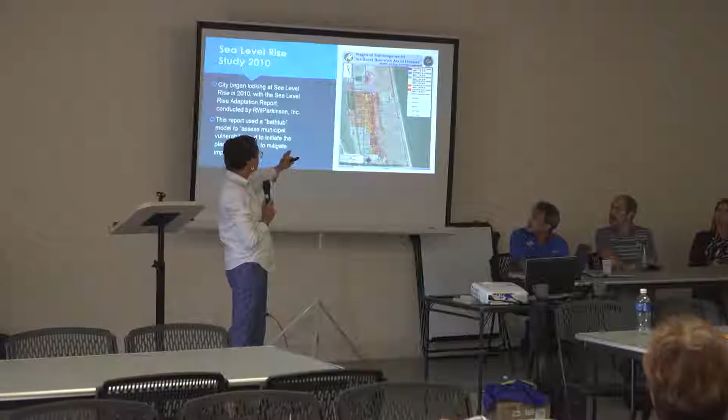Oops, I'm going back, sorry. Do you guys know about Satellite Beach?

So it's funny because I used this presentation at Florida Defense Alliance, and that's basically presenting to the military community on what we've done for our city for sea level rise, because they were looking at very similar vulnerability studies for their installations. So it's definitely a common thing that if any owners of any major infrastructure, major facilities that are very costly could be damaged by any risk, sea level rise and climate change analyses are just part of the typical risk assessments that people do now.

So this is kind of where we've been. We started with the resilience, the Climate Ready Estuaries Project, which was basically that graph I showed you before. We went on to start looking at our comprehensive plan, and we adopted an adaptation action area in our comprehensive plan for the oceanfront, basically addressing erosion. And we left open, okay, now we're going to look at other areas.

So then we went and partnered with the East Central Florida Regional Planning Council and went after a Florida Department of Environmental Protection Coastal Partnership Community Resiliency Grant in 2014-15. And that grant was really the start of when we started engaging the public in this issue.

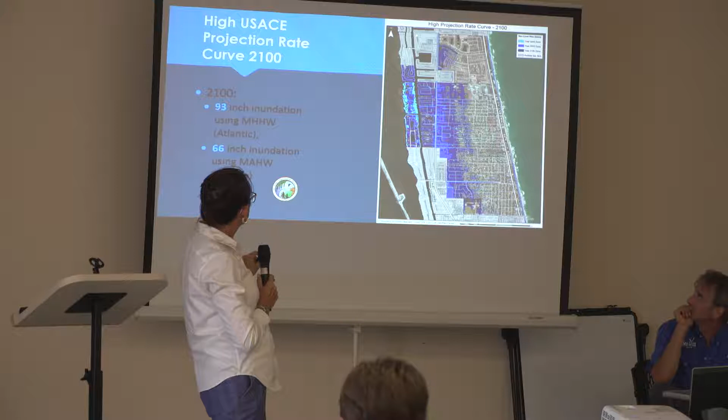So these are the issues that we're facing, and this is just sea level rise. This is not hazard analyses or anything like that. This isn't when a storm hits or anything like that. This is just sea level rise.

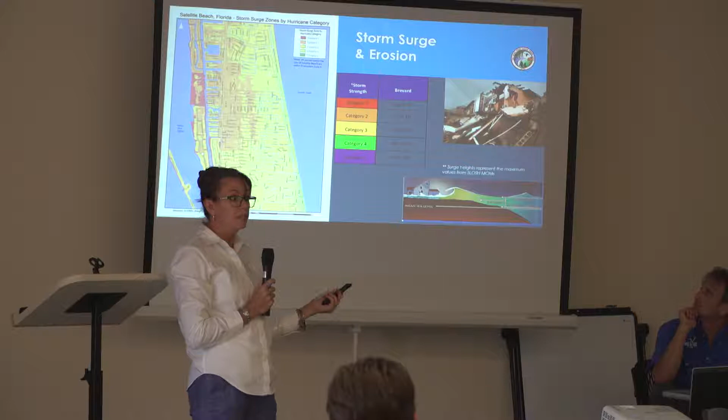This is storm surge, and these are the models that we use to come up with what are the major storm surge impacts. And storm surge is probably the most noticeable, erosion is the most noticeable impact of climate change in our community right now, okay? So most people see that when you go out to the beach after a hurricane, is the erosion.

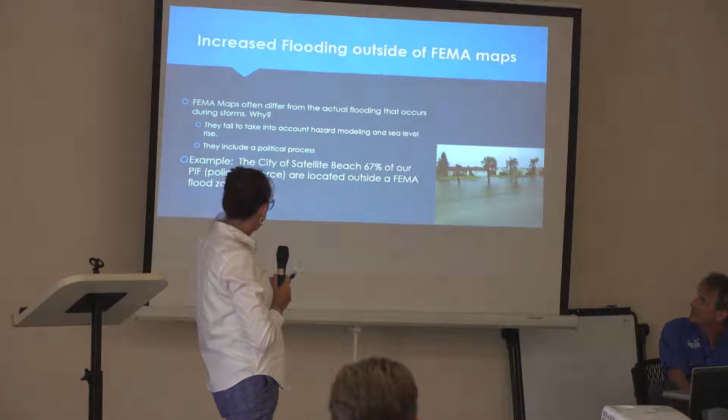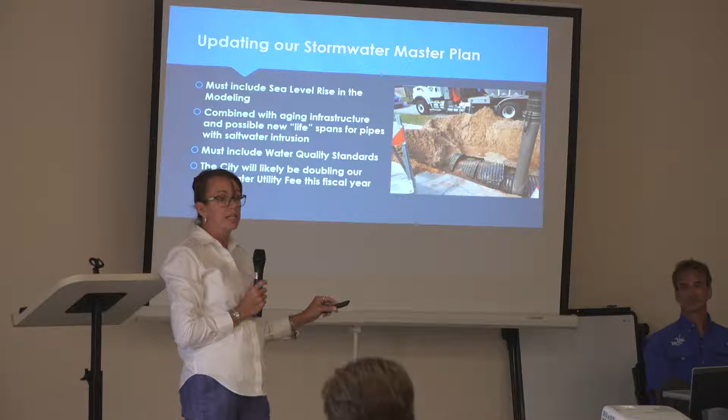These are our flood zones right now. I'm just going to skip through this, but this is the hazard modeling that Dr. Evans is going to speak to you about. Right now the city is redoing our stormwater master plan to address pipe issues, since that affects the lifespan of our pipes. That's affected by saltwater intrusion, so we have to consider whether we start looking at a shorter lifespan for our pipes due to the rising water table, pressure on the pipes, and saltwater intrusion.

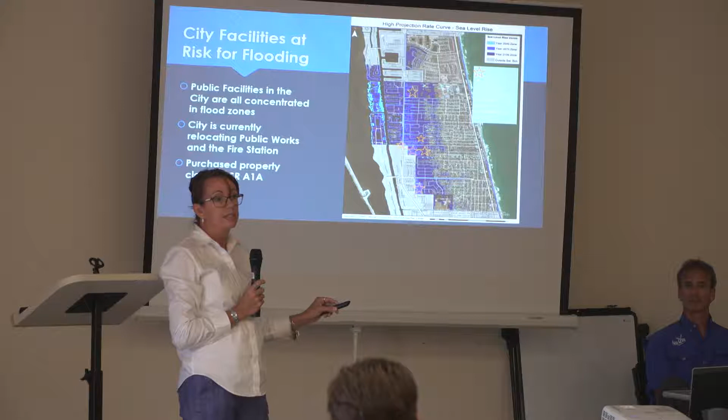Here's some of our city facilities that are currently at risk with this flooding issue. So that's some of the things we're talking about now. We've already purchased property to start moving some facilities.

He's going to a Surfrider meeting about sustainability, so that's one of the things our city is very proactive about. At this next council meeting, council will be approving the contract to put solar on City Hall, and we'll be the second city, I think, in the Central Florida area to put solar on a municipal building. Second city? No, I'm sorry, third city, because Orlando's got 3 facilities.

And that's it. So, with that, I'd like for you all to take a moment, since you got kind of an introduction, a first blush, and do your Mentimeter exercise. Tara, you want to come in?

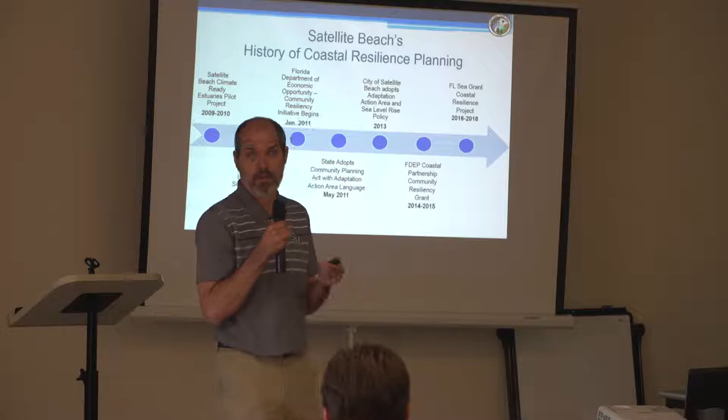I've got the long history here. Really, Satellite Beach throughout the state of Florida is looked upon as one of the leaders in this planning. I know working with City of New Smyrna Beach, we're getting ready to start with them, they're just really getting started, and what woke them up was Hurricane Irma, they got hit really badly, and they now understand they want to plan for rising seas. You guys here should just applaud yourselves for all this work that you've done.

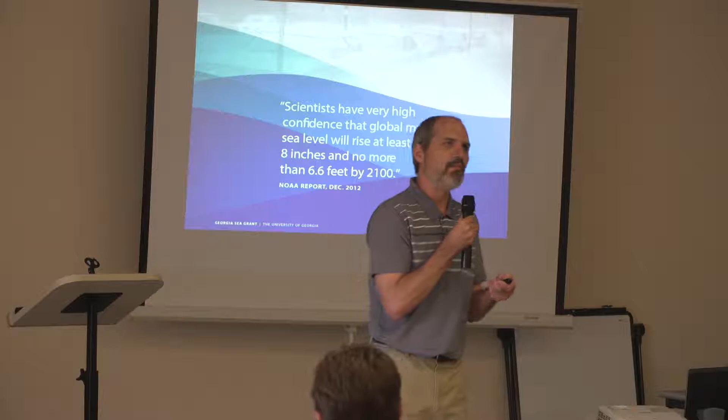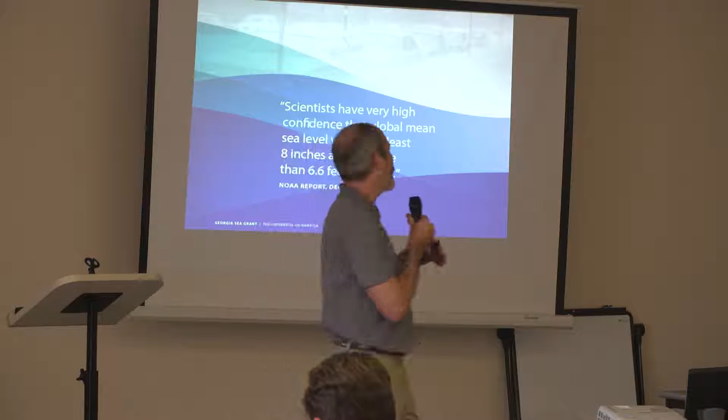And of course, yes, the sea is rising. We're already convinced of that. Yes, we think it's accelerating. What makes the planning hard, I always use this slide to talk about how complex this is: if you go to NOAA reports and dig in, to be very conservative in how we think about this, we're very confident the sea is going to rise by at least 8 inches, all the way up to 6.6 feet by 2100. We're pretty sure it'll be more than 8 inches, but of course what to do in terms of planning becomes a very difficult conversation.

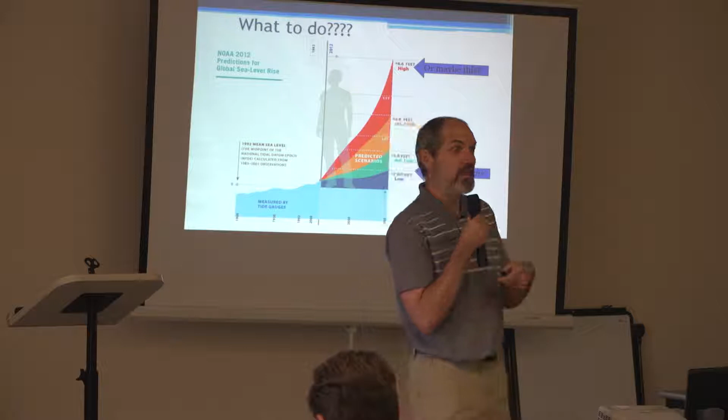I often get asked, how much is the sea going to rise? And I'm not sure. There's a lot of different things in terms of carbon emissions, all sorts of decisions we make. But in terms of planning, I always say it's kind of the wrong question. It's really, what is your risk tolerance? And so that's really the important thing to think about.

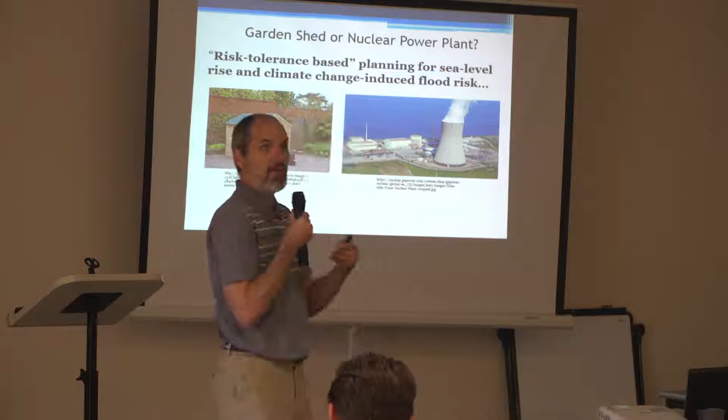If you're building a garden shed, you might not care about sea level rise. If it floods, who cares? You're not going to elevate your garden shed up 8 feet off the ground, it doesn't make sense. But a nuclear power plant, on the other side of it, you're very risk intolerant. So you want to plan for very improbable scenarios over long periods of time.

What's nice about Satellite Beach is you've already had that conversation, and it's actually in your comp plan with the language. So in terms of planning, we already know what we're going to look at in terms of infrastructure, and there's already adaptation action areas you've set aside, really good work.

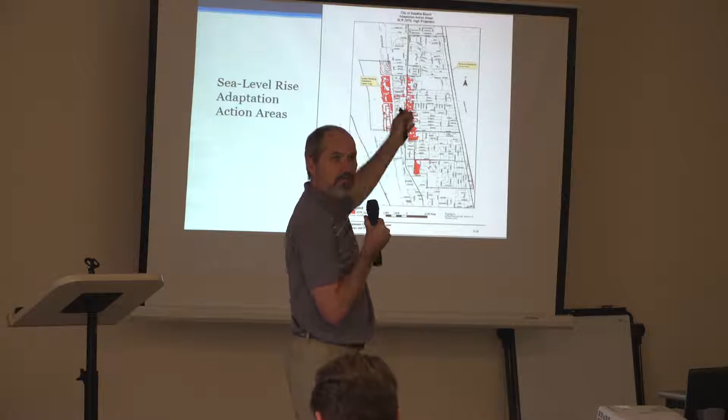These maps, the information starts to look the same, and there's themes, basically South Patrick Drive - we'll see it's going to be an issue. It's more or less the western side of the island where we're looking at flooding issues, and on the east side it's really erosion.

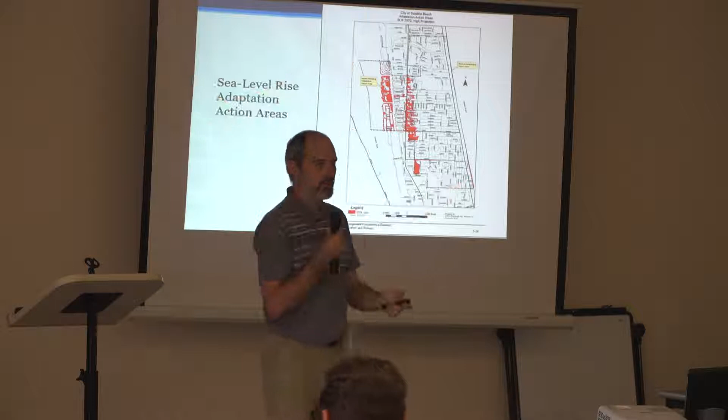For this project, we were trying to go that next step. We've gone through all the planning, the hard discussions about sea level rise, that's very important. But once you accept it's happening and start planning, it gets into the nitty gritty - understanding your infrastructure, making decisions, and actually implementing and spending money on projects.

So we're going to talk about HAZUS, and I'm going to hand over to Crystal Goodison. This is a FEMA model used for hazard planning. It's a finicky beast, and we're going to talk about that some. It's also very useful. Using HAZUS and all of this GIS data, how does that get into very specific things in terms of policy?

Also, learning from stakeholders - students have worked on this project, and there's a lot of learning that goes on with this. A lot of this work is really groundbreaking, in the sense that for a community being this far along, you're one of the only ones in the country that's this far along. So really, leadership there is extremely important.

So, stormwater. It started with going in maps, going out in the field, working with Dr. Fergus, working with folks like Alan Potter, and there's an island in the back - I'm going to show a picture of the island.

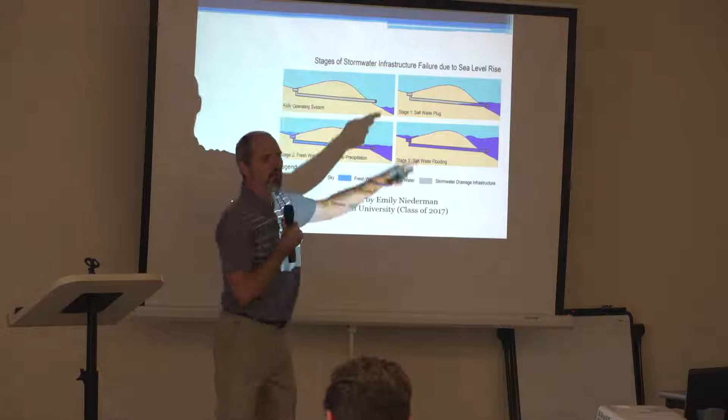When we talk about sea level rise and stormwater, this might be hard to see, but stormwater drainage is the thing that starts to go first. Why is that? In areas built back in the 50s, the way we used to do stormwater is we would just put a pipe in and go out right in the estuary. After 1975 or so, the Clean Water Act, we stopped doing that, but a lot of areas still have this.

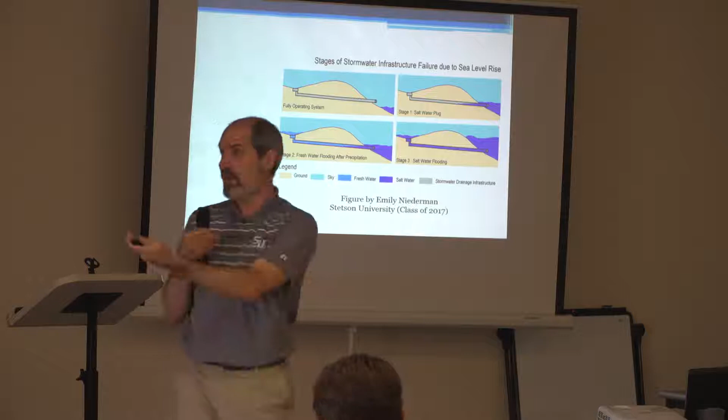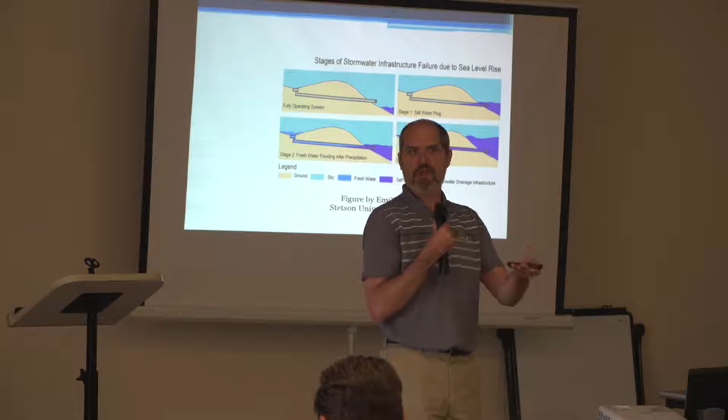When these pipes were built originally, the sea was a little bit lower, and when it rained the water could flow freely. As the sea rises, you start getting things like oysters in the pipes, more saltwater intrusion - not necessarily visible, but people notice oysters. They also notice that rainfall used to drain, and now it's not draining as fast as it used to. Why is that? It's because of this issue.

Then we get extreme situations like Miami, where when the sea gets high enough, it comes out the wrong way. That's when people usually freak out, and that's usually when communities start planning - when it's not raining today and there's water coming out of the storm drain. Why is that? It's salty.

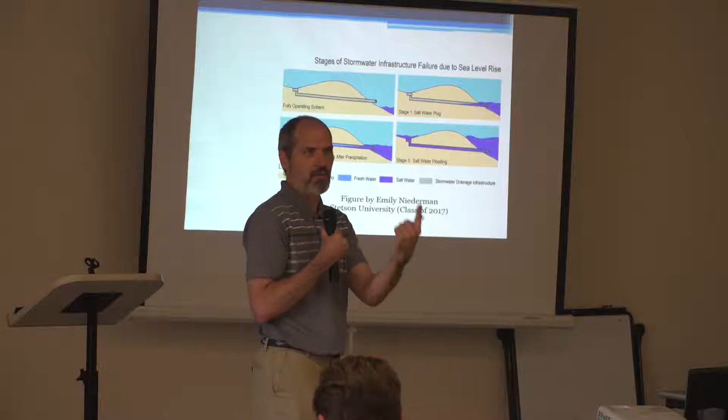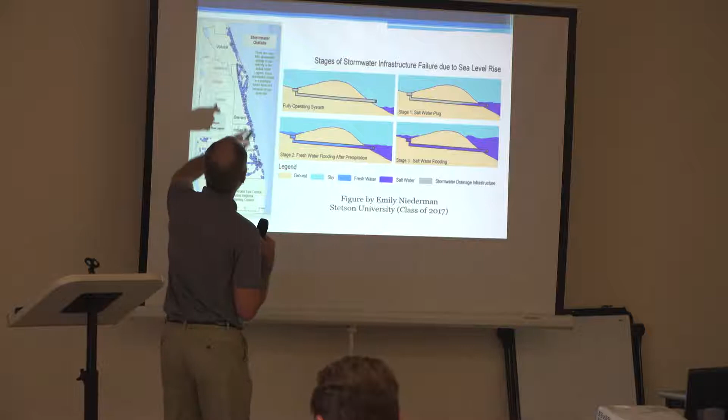There are 2,000 outfalls. If we think about the Indian River Lagoon - this is a map I got from Tara, all the way up from Volusia County down to Martin County - this is a regional issue. When we look at this, there's a lot of planning that needs to happen, and there's also water quality issues as well.

So we know about the lagoon. Having those pipes going straight out is not good either for water quality, but just in terms of flooding, it's going to be a huge issue.

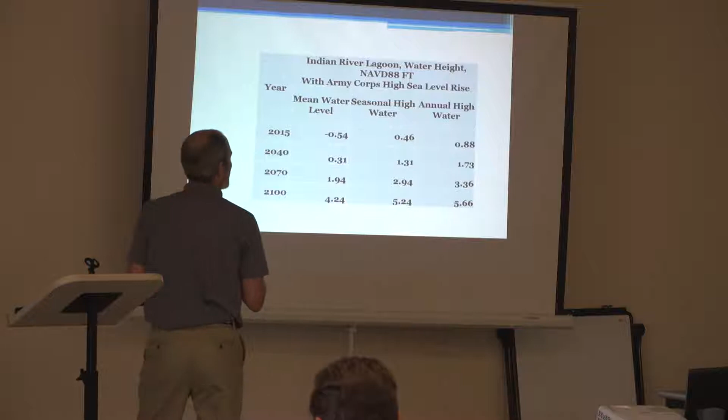Here are just some numbers, kind of Army Corps sea level rise. This is what we used. This makes some sense. I'm not going to go through this in too much detail.

What was great about Satellite Beach, which is unlike a lot of other communities, is that your public works people are pack rats, and so they kept all of the old as-built surveys and maps. All that stuff is there. It's wonderful, because a lot of communities throw that stuff out.

And then what does that mean? That means you gotta pay surveyors to go and recreate all of that information. What we were able to do is take it all and patch it all together. Island spent about a year actually working on this, I think. And it's wonderful, so we've got lots of information, lots of data. We've got elevations for most of the inlets, the invert elevations, so it's a modern, up-to-date stormwater GIS.

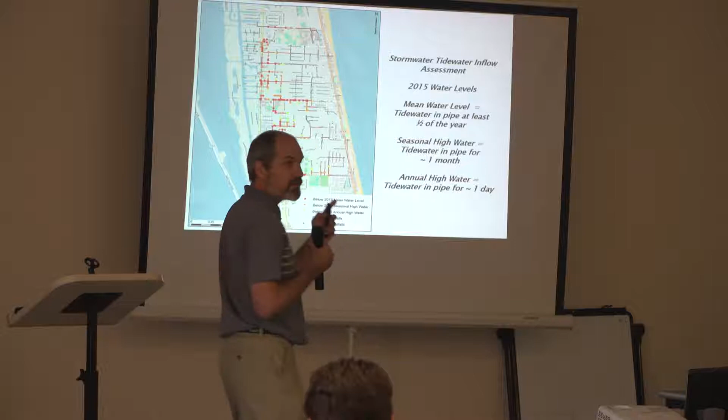What that allows us to do, and why this is important, is that when you know how low the stormwater pipes are, then you can very easily calculate where the water is actually going.

So where it's red is showing that just mean water level, this is average water level from the west side here, is actually going to penetrate into the storm pipes. That means you would look down, and unless there's something blocking the water, there's going to be salt water within these pipes.

When it rains, it can still drain out, but it makes it slower. And what happens over time is, of course, with sea level rise, no secret, it starts to move, right? And now they're red, so this is actually going to 2040. And really, Cassia is one of the hot spots.

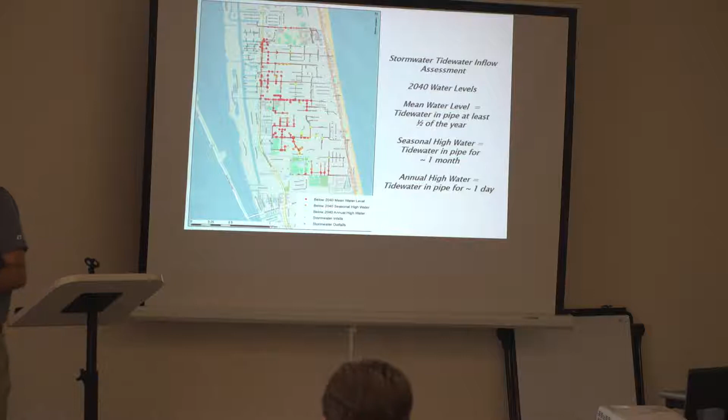And other areas, again, South Patrick Drive is where we really see a lot of the issues with stormwater. And of course, it makes perfect sense because that's where everything is low. We could probably go out right now, look in drains, and we'd see water, right?

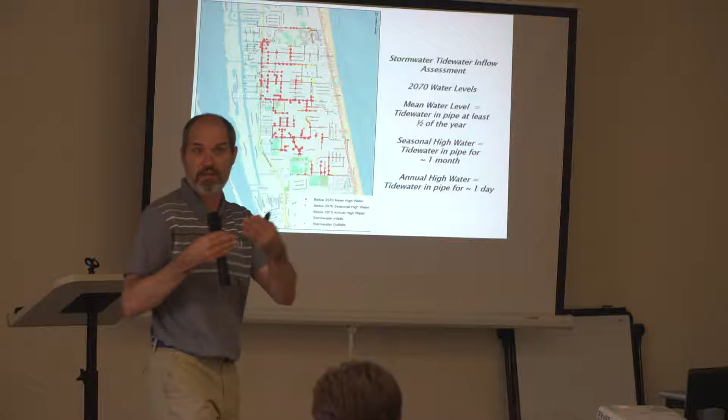I mean, not even thinking about water quality, which of course is going to change, and with the thinking about the lagoon and all the issues with the lagoon, there's opportunities to fix things to reduce the impact. I know that you guys are leaders in that as well.

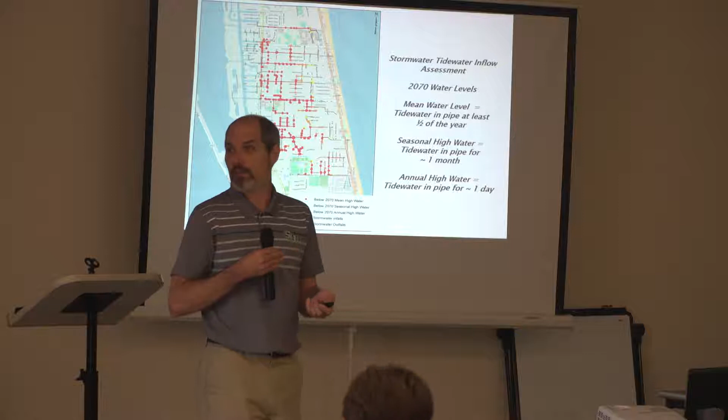But what this says here is that this is long-term, a lot of infrastructure that needs to be updated. It's going to take a lot of creative engineering, and it's going to be a lot of work. That's what this says here.

And what you might note is there are some areas over here that we didn't actually have the invert elevations. These were not in anything that we could find. So talking with Bert, most of these are basically just one pipe with maybe one inlet that goes out to one outfall, for a bunch of the streets over in this area.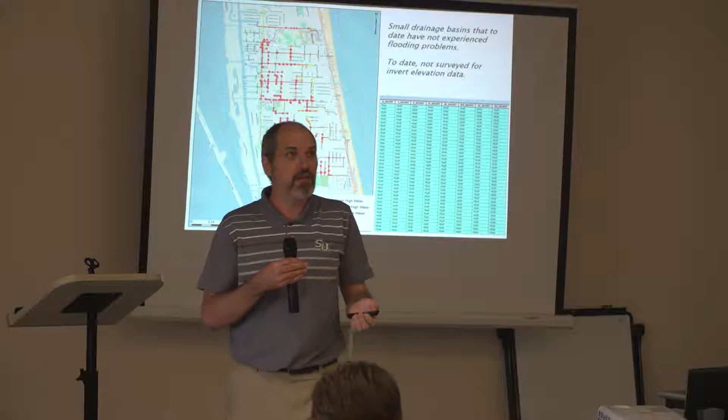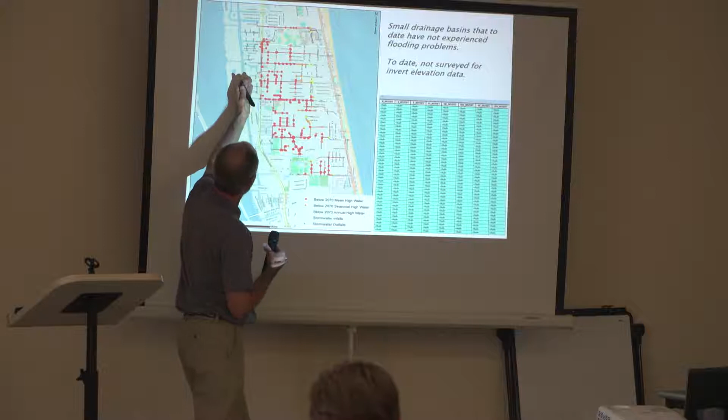And apparently there haven't been a lot of flooding issues there yet, but what's likely to happen is that once it starts to happen, it's going to start happening along all of those. So this is kind of future work, to kind of get out there and survey some of this. But yeah, the main area is right along this west side, all along South Patrick Drive.

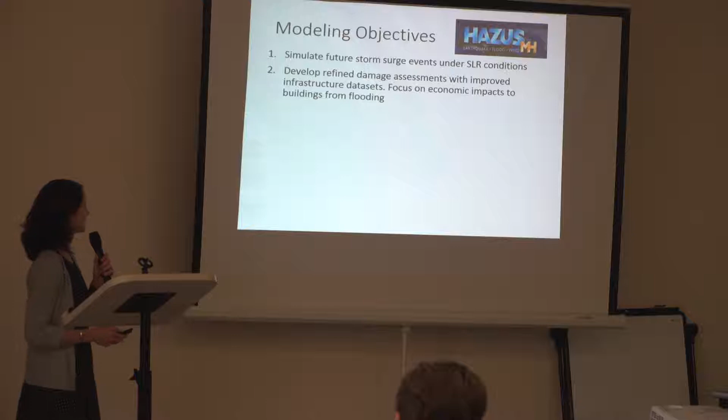A couple of our specific modeling objectives were, first, to model coastal storm surge and model future storm surge under sea level rise conditions. Then, from those future storm surge events, figure out what the economic impacts were going to be. We focused on impacts to buildings, economic impacts to buildings from flooding.

One of the great things about HAZUS is that it allows you to do these damage assessments using all this information within HAZUS. The typical way they do damage assessments is by census block. They have an inventory of all these different building types, what their values are, and it allows you to pick a disaster and figure out what the impacts are going to be within these census block areas.

If you're a whiz at HAZUS like Dr. Paul Zwick is, and he trained Adam Carr, one of our graduating students this semester, trained him how to break into the software and go down to the parcel level. So not just looking at impacts for a coarse area like a census block, but drilling down to see if we can figure out at the parcel level what the economic impacts would be.

And then finally, where we have information, building footprints. So looking at what the impacts from a storm surge would be at the building footprint level. What we wanted to do is try to get really refined information to give to the city to say, under future sea level rise conditions and future storm surge, these are going to be the economic impacts moving into the future.

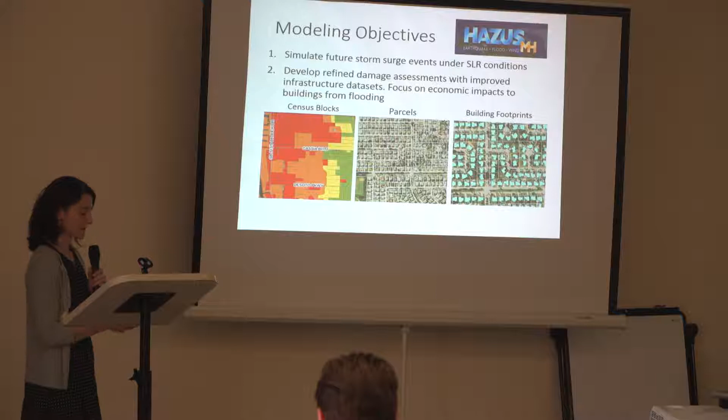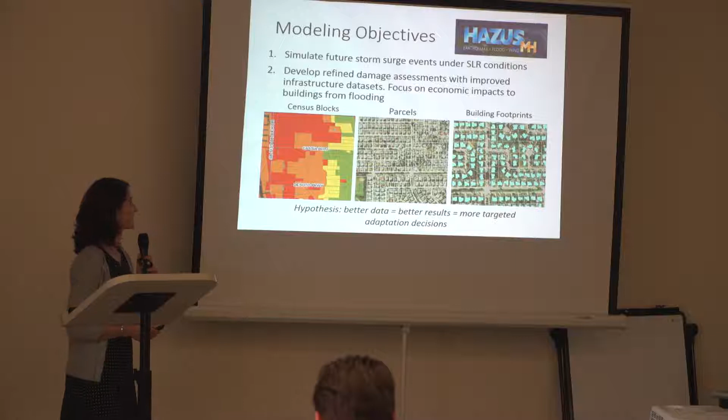Our hypothesis here was that if we use better, more refined data, we're going to get better results, and we'll be able to give the city more refined information so that when they move forward and make adaptation decisions that are financial in nature, they'll be able to make more targeted financial investments for the city. So quickly, our methods - I'll try not to go too deep into the methods.

Basically what we did is we modeled a 100-year storm event. We added sea level rise to that, a couple different scenarios of sea level rise. We calculated what the building impacts would be under each of those sea level rise scenarios. We looked at that at the census block level, parcels, and building footprints for where we had footprint coverage. Then we compared the results to say, one, how does storm surge change with sea level rise increments added to it, and two, are we really getting more refined information when we use this better data, parcels and footprints? Are we really able to get a better economic assessment from that?

So I'm going to show you some results. I have to add this disclaimer that these are draft model results, and they represent a hypothetical extreme surge event. These results surprised us - I'm not going to be shy about saying that - these results were not what we expected.

We modeled the base 100-year storm surge event, and we got this, which was quite a lot of flooding. Then we added about a foot of sea level rise to that, which is what the U.S. Army Corps of Engineers says would be the high projection for 2040 - just over a foot. And we got some more flooding.

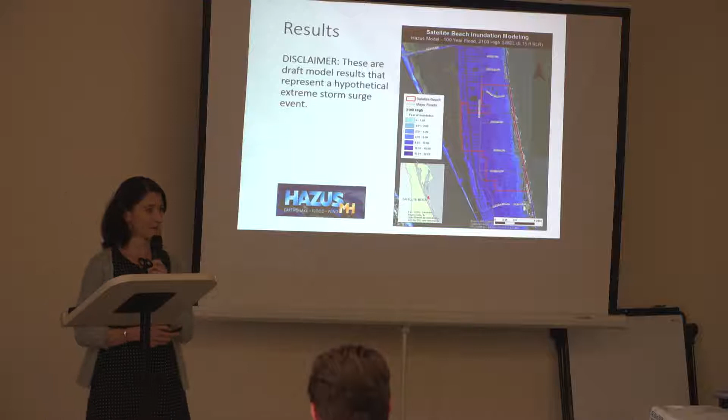And then we added the 2070 scenario, which is about 3 feet of sea level rise on top of that storm surge. We got even more flooding. And then we got way out to 2100, which is about over 5 feet of sea level rise, and it flooded basically the whole city.

This surprised us, for a number of reasons. One, this is very different from what the FIRM maps say. The FIRM maps, the flood insurance rate maps from FEMA, which are regulatory flood maps, delineate the floodplain. Generally we see a lot of overlap between the HAZUS model, which is developed by FEMA, and the FEMA FIRM maps, which are also developed by FEMA.

But what you can see on this map is that there's really no flood risk on most of the peninsula. All the floodplains are really on the coast.

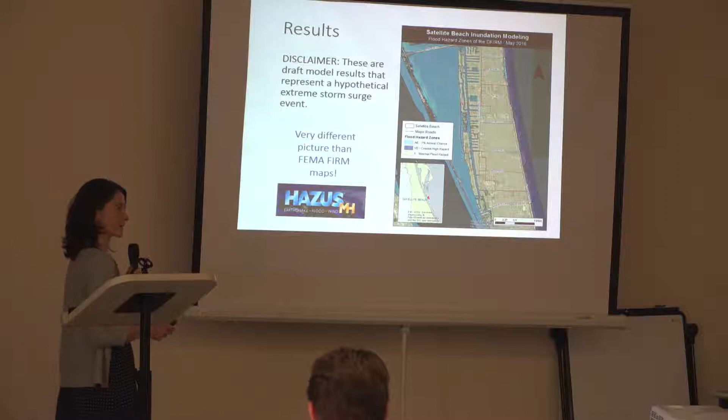So Jason and I went on quite a research mission, along with Adam and Dr. Zwick, to try to figure out why is it so different. We talked to FEMA, we talked to the FEMA contractors. We couldn't really get a great response from them in terms of why this is so different. So what we ended up doing was kind of pivoting to say, okay, it's going to be hard for us to develop recommendations based on this for the city.

This is a very extreme event. So what we'd like to do is a little bit more modeling, and I'll talk about that in just a minute. I think Jason had a few things to say about that.

Yeah, so this gets into more general policy context. I know we talked with John as well about some of this when we got the modeling results, what's going on here. And I think you were actually the one that put us in touch with the FEMA contractors.

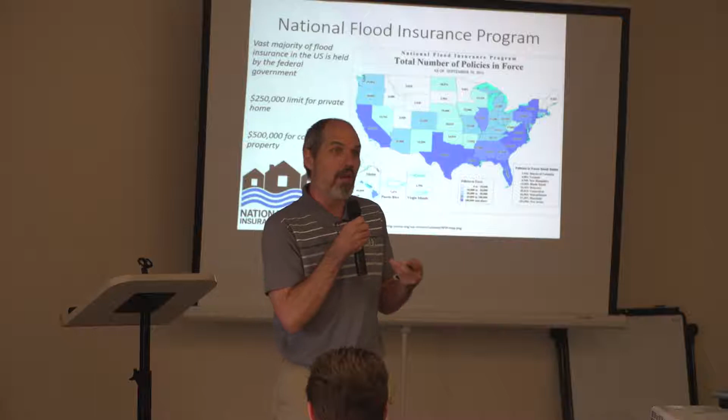So the flood insurance program, there's a lot of conversation going on about it, and most of the flood insurance within the United States is actually through FEMA. And one of the things we know is that the flood insurance program is in debt. About $35 billion is the latest estimate I've heard, after Harvey.

It's not exactly clear. Do you know the exact numbers, Thomas? No. And we have $1 trillion of exposure to coastal properties throughout the U.S. The way that I'm communicating this, and a lot of the floodplain people are communicating this, is we have to be very, very careful with FIRMs when they're used for insurance, because it's a poor insurance program based upon the accounting of it right now.

So we have to be very careful, and it's never a good idea to tell anyone who's not inside the floodplain that they're safe from flooding. I would never do that. You should never do that. The FIRMs are kind of the baseline, they're what's used for basically mandating that if you're going to get a mortgage, you have to buy flood insurance within these areas. But it's a good idea to get flood insurance outside of the FIRMs as well.

And I think in Satellite Beach, most of the policies within the city are not in the special flood hazard area, is that correct? So that tells me that a lot of people in Satellite Beach are seeing risk for flooding and are actually availing themselves of the insurance.

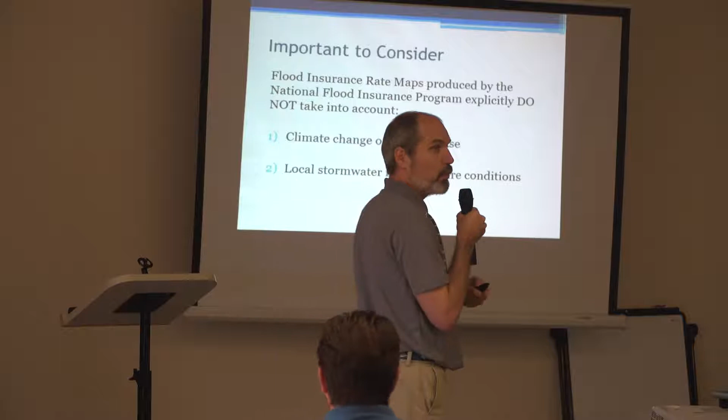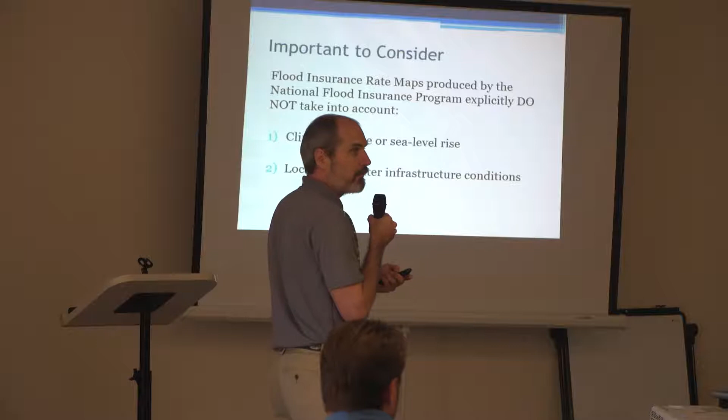FEMA will actually tell you, when we talk to FEMA contractors, that they don't look at local stormwater. So that's very important to think about in terms of flood risk. And so from that, I'm going to turn it back over to Crystal for all those caveats.

Our tag teaming. Can I borrow that? Yeah, okay, so a little bit of our lessons learned.

HAZUS is extremely risk averse and may overestimate the flood probability exposure for Satellite Beach. That's not all bad, that's really good when you want to locate critical facilities and do evacuation planning. You want to be risk averse, and you want to make sure you're getting people out of harm's way, and locating your critical facilities out of harm's way. So it just needs to be used appropriately.

The second thing we learned is that modeling storm surge events with precision is difficult. The nature of coastal storms is that there's a lot of variables happening, and it's really hard to get to a precise level.

So moving forward, it's very difficult to do that. The other thing we learned is that the coastal flood model may have trouble with barrier islands, which have largely non-tidal influences. In an area like Satellite Beach, we know that most of the flooding is coming from the Banana River, Indian River Lagoon side, and this particular model might have a little difficulty taking that into account. The last thing we learned, that we already knew, is that the software is extremely finicky. We spent quite a lot of time getting the software to work in a way to do these models.

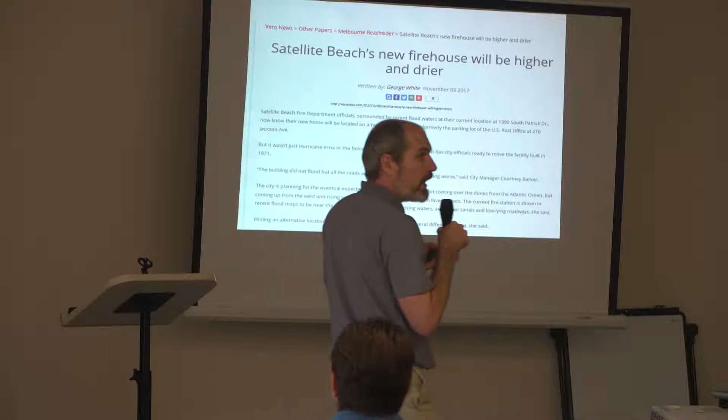Yeah, and so, but using HAZUS for a fire station is very appropriate. That's one of the things FEMA will say - you never want your fire station to be flooded, ever. You're very risk averse, it's almost like a nuclear power plant in a sense. You just don't - those are your first responders. You never want there to be water in there, because they're out there to save people's lives. If they're struggling with a flood, that's terrible.

Yeah, I have to say one of the highlights of my career was actually, when Irma was approaching, going out to the city council and talking about the fire station site. Under those conditions, and I think very, very appropriately, deciding that yes, we need to move the fire station to somewhere that's higher and drier. So that's one of the outcomes from this project I'm most proud of. Just want to note that.

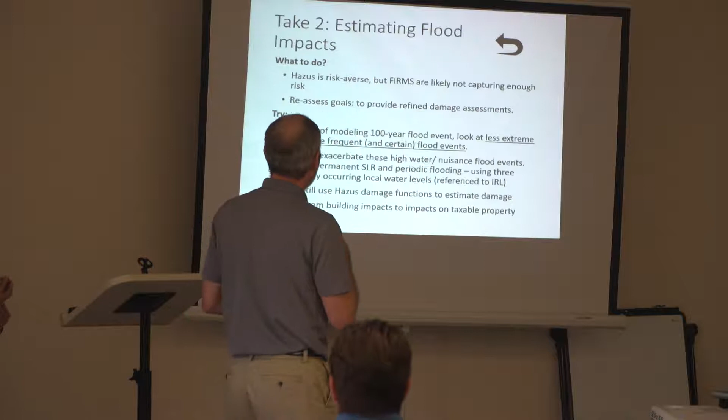And one more time back. One more tag team to sort of finish this out.

So we wanted to pivot a little bit away from HAZUS and try to figure out how else we can estimate economic impacts of sea level rise and flooding. So we went back and reassessed our goals - okay, what can we do that's actionable for the city? We thought, instead of trying to model coastal storm surge, why don't we look at less extreme but more certain flooding events?

We know that at high water levels, at high tides, we have nuisance flooding, sunny day flooding, happening across a lot of coastal cities in Florida. We know that sea level rise is going to make those flooding events more frequent, and so we know that's for certain. So why don't we look at the economic impacts of that moving forward?

So what we decided to do was model sea level rise at three different water levels referenced to the Indian River Lagoon: a mean water level, which is our average water level; a seasonal high, which happens in the fall; and then an extreme water level, which happens about once a year. But these are known water levels that are going to be happening on a regular basis, and more frequently, in the city.

And we decided to shift away from looking at building impacts to looking at taxable property impacts. So why look at property impacts? Well, for most municipalities in Florida, property taxes are incredibly important. Assessed values for the properties in the city are almost $850 million in assessed value - I pulled these from the city manager's adopted budget for this year. The market value of that property is about $1.4 billion. So the revenues generated from ad valorem property taxes are about 58% of the general fund, about 39% of the total revenues for the city.

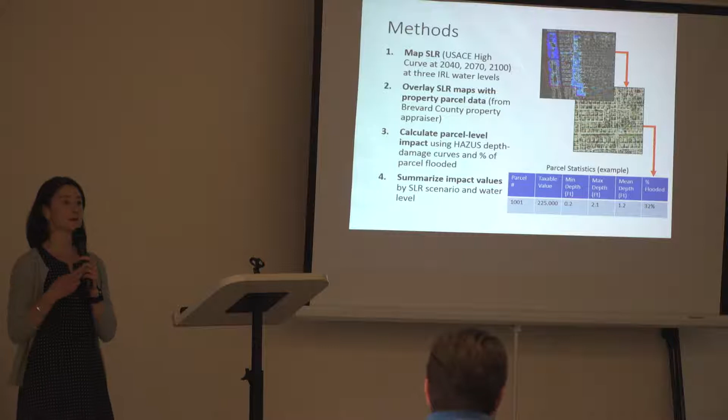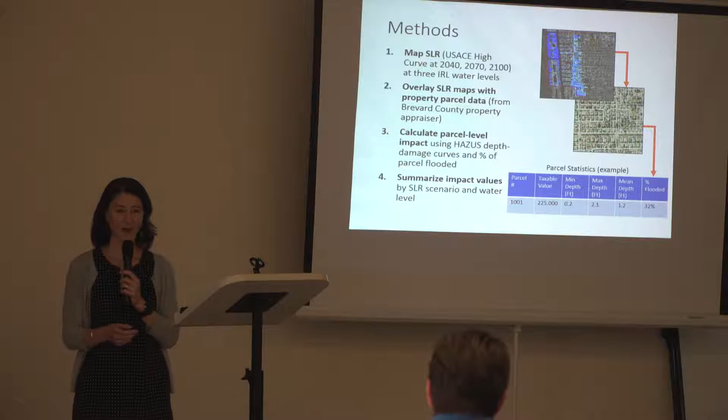So we went ahead and mapped sea level rise on top of these lagoon water levels. We overlaid those with the property parcel data from the county. And then we calculated statistics at the parcel level. So for every parcel, what is the minimum depth of flooding, maximum depth of flooding, mean depth of flooding? What percentage of each parcel is going to be flooded at each of these scenarios? And then we tried to summarize those impacts for each of these sea level rise scenarios.

So what we came up with, and I'll go into each one of these in detail, a lot of these maps are going to look very similar to what you've seen before. That's not different. What's different is digging into some of the impact levels. But we did 3 scenarios: about a foot of sea level rise at 2040, about 3 feet at 2070, and about 5 feet at 2100.

At 2040, what we see is the flooding is minimal. You've got a lot of flooding on the western side of the city, Samsons Island, Lansing Island, and some of the finger canals. And while the overall economic impact is low, less than 1% of the property tax base is impacted at this level because most of the flooding is along Samsons Island, which has no taxes.

But while the impact is low, the stormwater analysis that Dr. Evans showed that there could be a lower drainage capacity for the whole city. So while these maps don't particularly show flooding right now, there could be more inland flooding that occurs during a high water event that also co-occurs with rainfall. So these sea level rise models are bathtub models that don't account for rainfall.

At 2070, things start to change, and those are the maps that you have on your tables today. That 2070 is about 3 feet of sea level rise. We see a lot more permanent flooding occurring on the western side of the city. It's still localized to these western islands, but at the high water levels, it starts to creep inland. Some particular areas of concern are the area of South Patrick Drive, which we're going to hammer on a lot, Cassia, and then also DeSoto Parkway.

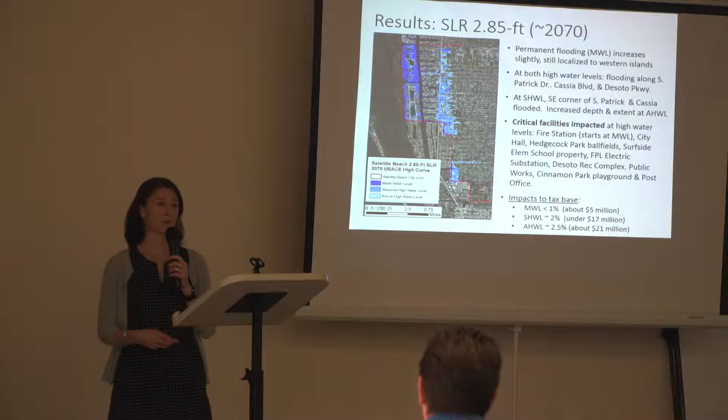And in terms of percentages, that seems low, but what these numbers don't show you is the other half of the story, which is that when your streets are flooded, access to your neighborhoods is flooded. And so if you can't get to your neighborhood, that's going to have an impact on your property values.

So, some considerations just to wrap this up. At 3 feet of sea level rise, things become problematic, and you guys already know that. That's what's been adopted in your adaptation action areas, but we're trying to hit it home here. Something else for the city to consider is maintenance of property values and the tax base.

Some of the economic impact numbers at 2070 might not seem high, but the city's going to really need to think about an investment in roads, stormwater, and infrastructure so that they can maintain access to properties and reduce property damages. Particular areas: South Patrick, Cassia, DeSoto Parkway.

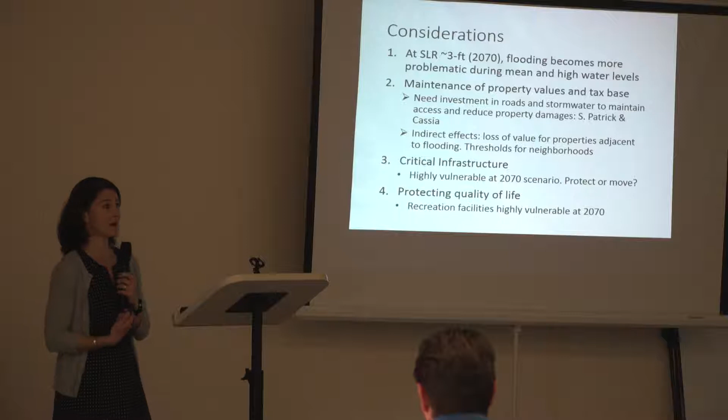And then finally, protecting the quality of life. There's a lot of recreation facilities that get impacted under these sea level rise scenarios. Sampson's Islands get impacted first. This is a community that seems very invested in their recreation opportunities, and I think protecting those is going to be important to protecting the quality of life here in Satellite Beach.

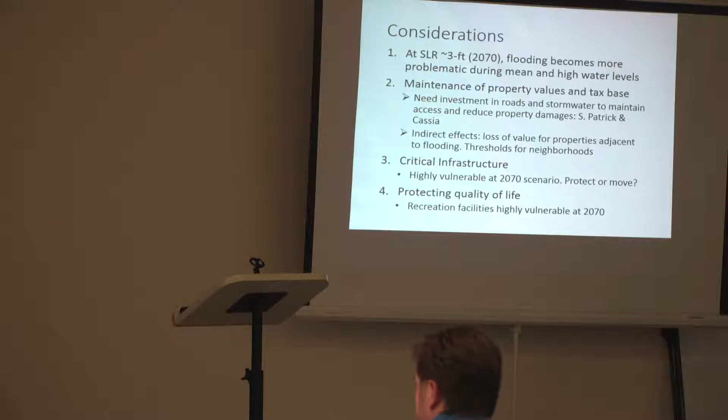Yeah, sure. Do you consider tax base? Roads are critical infrastructure. Roads tend to go below building base. If a road is underwater for a period of time, it'll probably damage it. Cost $1 million a lane mile to replace it.

And would it be fairly simple to use the models to figure under each scenario how many miles of roads will be impacted, and then we can add that as a cost to the city that has to be dealt with? This isn't a 'well, maybe we'll fix it' - it's a 'we will fix it or abandon the road.' That's an excellent next step. That's an absolutely fairly simple thing that we could do and add in, and we absolutely can do that this summer. You've got the tool, right?

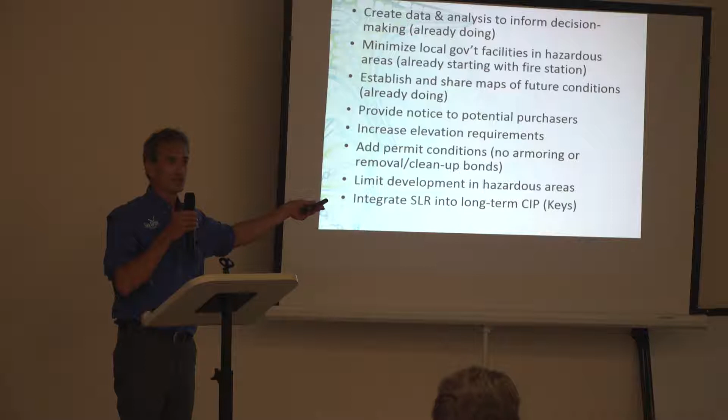So potentially if you're allowing new development or redevelopment, putting in some permit conditions there. One thing that's not being considered in many places yet is what do you do with properties that end up flooded? This has actually happened in a number of communities. Up in a town called Nags Head, North Carolina, they've got houses out in the surf and they can't even get them torn down and get rid of them. So you end up with these problems, and those are only problems you can deal with looking far out into the future. Once it's already happened, they're stuck with it, and they're really struggling.

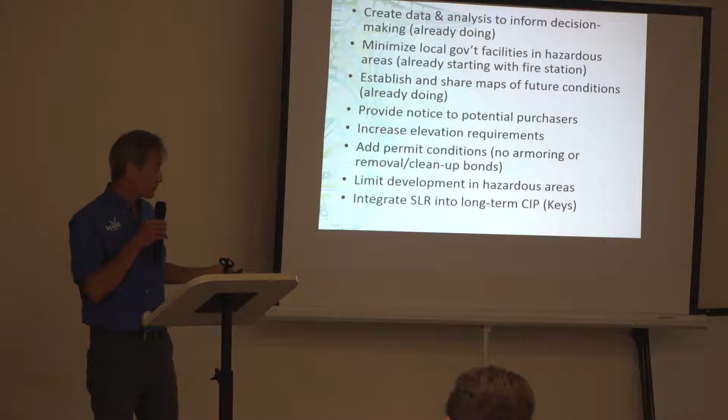And finally, of course, integrate your sea level rise into your long-term capital improvement plan. That's being done down the Keys, and Aaron will talk about that. So you're already doing this with providing information, and you've seen a lot of good maps. The data analysis really is the crucial portion. You have to do that before you can do anything else. And it's great to see Satellite Beach is doing some work that's just as good as a lot of the best states and regions that are really trying to attack this problem.

I guess you already went over the fire station, so I don't need to belabor it, fortunately. But yeah, very low area right now, 2.59 feet, and then here's the new site. We've got elevations up to over 8 feet.

And a lot of talk about drainage. That's definitely going to be a big issue here to address. So I just want to give a couple of examples. This first one, anybody know what that is?

It's what they call a duckbill valve. You'll tip it up and this will go onto an outfall pipe, and it's a one-way valve so that when your outfall is lower than the water you're draining into, say the Indian River Lagoon, this will keep water from backing up into your system. So if you have a very large pipe, like they did here, they made a very large pipe that's 6 foot. What that does is a very long, large pipe gives you immediate storage capacity for when the rain comes down. And if you can keep the tailwater from backing up into it, it'll buy you some time right there.

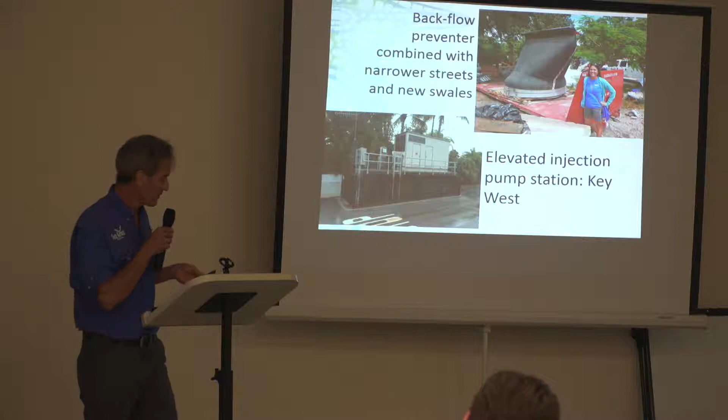Well, why is that? Because there isn't necessarily a standard that everybody's meeting for a minimum height. That's been a very big challenge down in Southeast Florida already, and there have been different approaches as to how to address it. The city of Fort Lauderdale, when they first started looking at this problem, said, well, we're just going to tell everybody that by X year they have to raise it to this height. And when they put that out for public comment, it wasn't pretty. So they started having meetings with residents and talking with them, and finally the residents helped the city come up with a very interesting idea. What they did is they passed an ordinance that actually makes it a citable offense to allow salt water to flow across your property and flood private or public property.

So when there's a high tide event and my seawall is low, and it's the low spot in the whole neighborhood, and it runs across my property and down the street and floods everybody else, I'm going to get a citation. And of course, like any other code violation from a local government, they can actually eventually, if you don't cure the problem, go in and fix it and put a lien on your property for that.

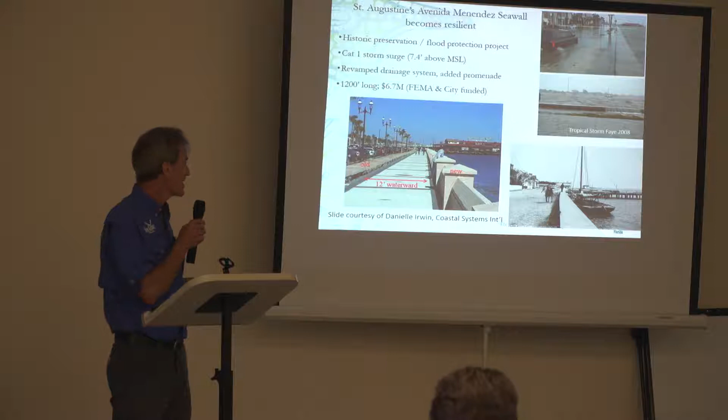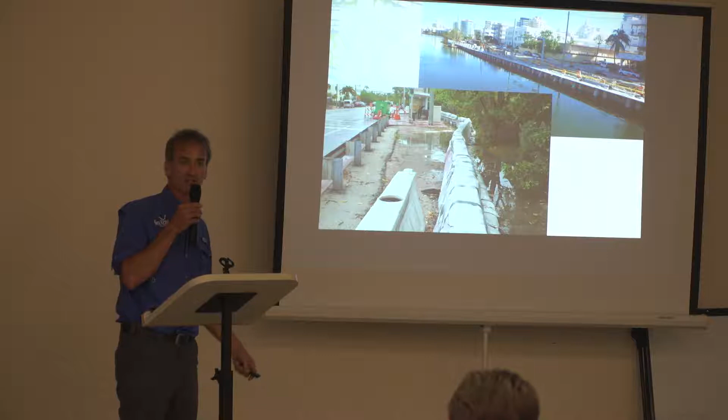And here you can literally see, this is duct tape, holding pieces of plastic together around these barriers. This is what they put up for the high tides that fall because they knew that this road was going to flood yet again. So they put up these barriers and covered them in plastic and taped it together, and then they had about 5 different pumps that they just dropped right into the storm sewer and right out into the canal there.

So this was a serious problem. They wanted to fix it now because they let it get bad before they started thinking about it. So they tried to go get some permits and get this done, and this was just, 2 years later, I think, yeah, this past fall, now they've got some problems because, well, they didn't have all their permits. There were some sections that weren't permitted in some places. They didn't quite exactly follow the permit. So there were a bunch of problems. And why? Because they were in a hurry. So these things take time.

Pardon the sophisticated graphics here. This is one that is very interesting from a redevelopment or development perspective. Essentially, this is what Pinellas County has done. When you do calculations to design a stormwater system, you always have to start with your lowest point, what they call the tailwater, because you want your pipe above the tailwater. Well, this pipe was designed to be above that old tailwater level.

But with just a small amount of sea level rise, as Jason had pointed out, the water is now backing up into that system. So what Pinellas County has done is they've taken their minimum tailwater elevation, and if it's tidal, what they've done is they said, well, we already had the tailwater elevation almost a foot above to account for kind of high water events. But now they raised it an extra 2 feet, 3 feet if it's serving critical infrastructure.

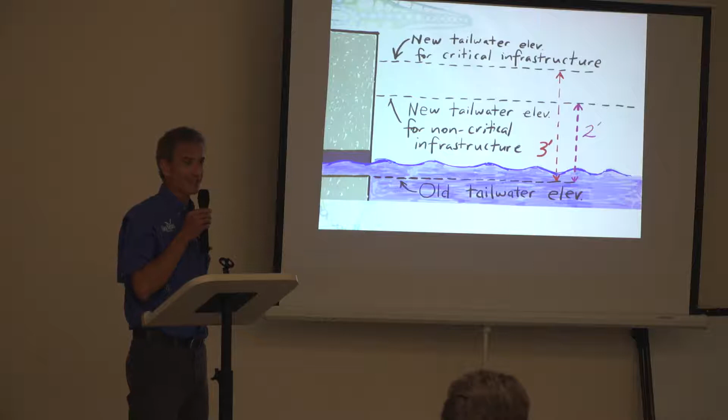Elevating buildings, another strategy. I think Aaron's going to touch on that. Yeah.

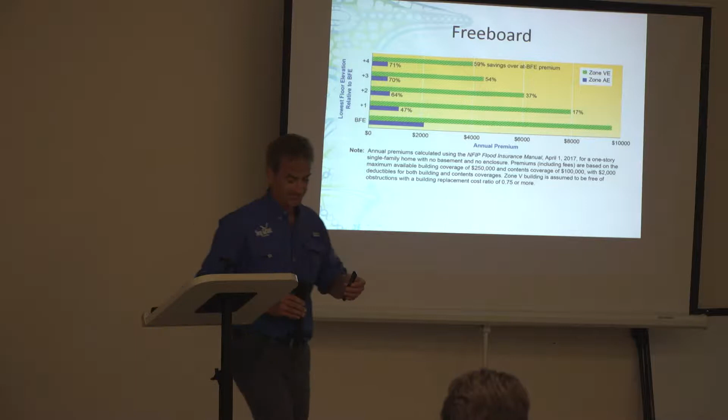Freeboard is something that's being implemented by a lot of local governments across Florida for multiple reasons. Some of them because they want to adopt higher than code regulations to participate in FEMA programs, some of them just because it makes good sense.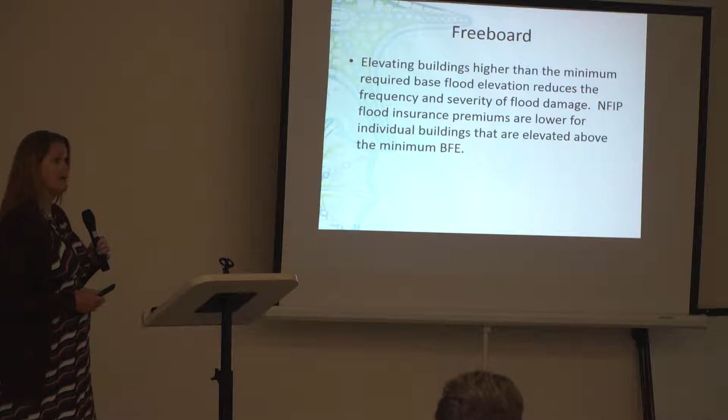Essentially what you're doing is requiring your development to start at a higher base flood elevation. Freeboard ordinances have been shown to account for themselves in terms of the investment you make over time. This is a great chart I got off of DEO's website, by the way. I didn't attribute it to them, so I'm doing that verbally now. For every foot of freeboard that you go, the savings over time increases. So it's one of those demonstrable methods you can use to make a code change.

The development community has typically pushed back a lot of the time on freeboard ordinances when being adopted, so there's a lot of public education needed with your development community. This is something that would be applied for new construction, or if there's a substantial renovation where more than 50% of the property value is being renovated over time, you would build to this higher standard.

Oh, wrong way. I've got to figure out the right way to go. Okay.

Challenges with freeboard. We've talked about some of these challenges with Courtney and Rochelle and others, that sometimes when you have significant, or really what I would call popular, height ordinances in a community where you don't want giant buildings everywhere and you cap a height at like 35 or 40 feet, a freeboard ordinance could be a constraint. So there have been local governments that have accommodated that by saying for every foot that you require elevation, we'll allow you to go beyond that height ordinance, but not in some unlimited fashion, because we still want to preserve the character of the community.

Key West recently went through this effort where they changed their charter and said you can elevate up to 4 feet, and they'll give you a foot beyond that height ordinance per foot that you're going to elevate. So it still kind of capped it, but it wanted to remove that constraint for people who want to actually elevate their properties for flood insurance.

Many communities—I found a great website, again through FEMA, that listed out all the Florida communities that have adopted freeboard ordinances. It started with requiring 3 feet, then 2 feet, then 1 foot. Of course, when you get to the 1 foot, that's the easiest to adopt with the least amount of pushback, so a lot of local governments have adopted a 1 foot standard. But more and more local governments are using this as a tool, and it's a great way—it's something others are doing, so it's not something that's weird or novel.

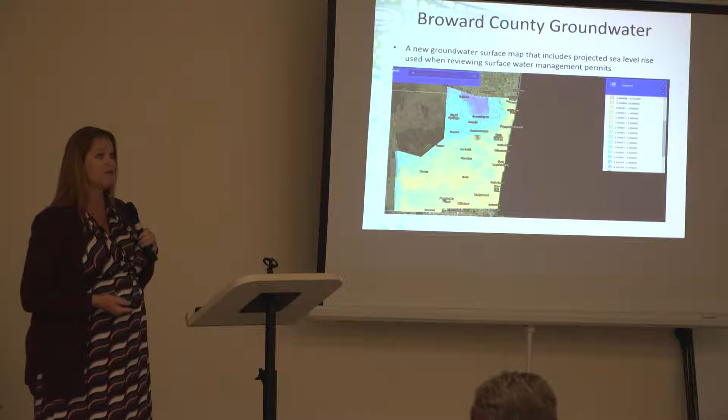Not the first one to say you have to factor sea level rise into your development decisions, but one that has said we're going to require your stormwater management systems to fit those future conditions. This is what it looks like, the map of what they have throughout the county. It took some work—they worked with USGS and I think even the Corps of Engineers to determine what those groundwater elevations are going to be. But then they adopted this map series into their code, adopted the regulations into their code saying this is how we are now going to manage our permits throughout the county.

Other Broward County actions—they're part of a regional compact for dealing with climate resilience, and they have their own climate action plan. The reason I put this up here is so you can see a comparison to what Satellite Beach has done; you're in line with what other local governments are doing, and that's an important thing. Right now, as Thomas mentioned, the City of Fort Lauderdale has adopted a sea level rise ordinance, and Broward County is in partnership with the U.S.

Army Corps of Engineers is doing a seawall analysis throughout the entire county, figuring out where those low points are to potentially start focusing outreach and education efforts. That way you don't have one guy raising his seawall while the guy next door doesn't, essentially obviating the need for the guy who raised his seawall in the first place. So they've developed this partnership with the Corps of Engineers to figure out where those choke points are county-wide for all the seawalls. I'd anticipate they'd adopt something similar to what Fort Lauderdale is doing, but they decided to study the extent of the problem before adopting a regulation to actually require something.

Now, this goes to Mr. Fergus's question: what do we do about roads? Here's a case study in Monroe County. What they did was decide to do a pilot project after two neighborhoods were significantly impacted by king tide flooding in 2015.

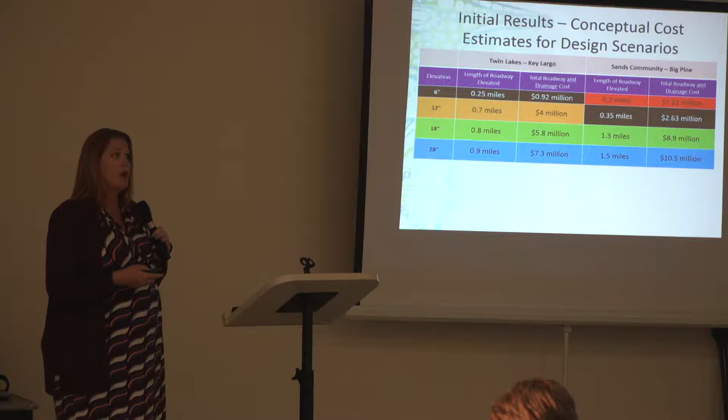So in terms of eliminating a scenario or designing to a scenario where we would not exceed 7 days of flooding per year, and that we would design this road to handle 2040 sea level rise, because a road has about a 25-year shelf life. This is what we were looking at in the two communities.

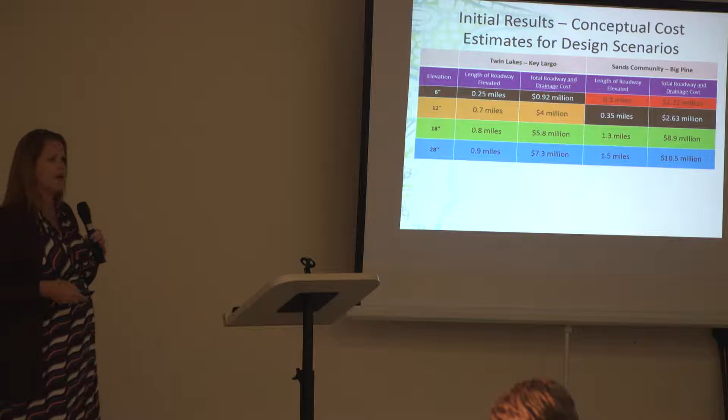So again, you see, a higher road, you've got to pave more. You go from 0.25 to 0.35. It increases the cost of what you have to do because more length means more stormwater and all of that other stuff associated with it. So ultimately, you can't factor in everything, but we had some design assumptions associated with that.

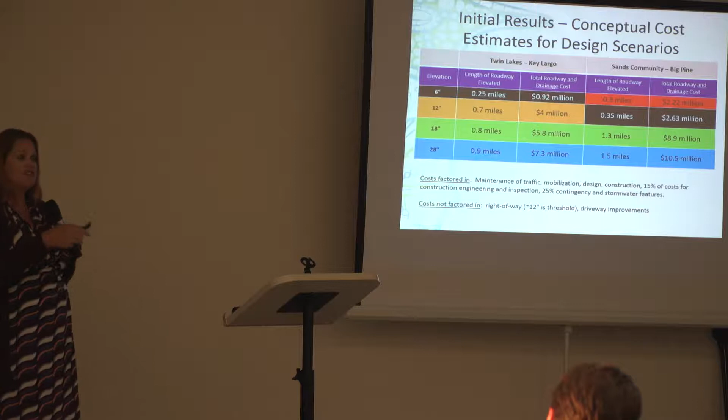And here was the other thing. The county was not ready at this stage of the game to start condemning right-of-way and start taking people's property. So the idea is, where is that sweet spot where we can provide some level of flood relief, still accommodate future sea level rise, still accommodate all the water quality requirements, but not start taking people's property away. And this was the sweet spot, the 6 inches and the 12 inches.

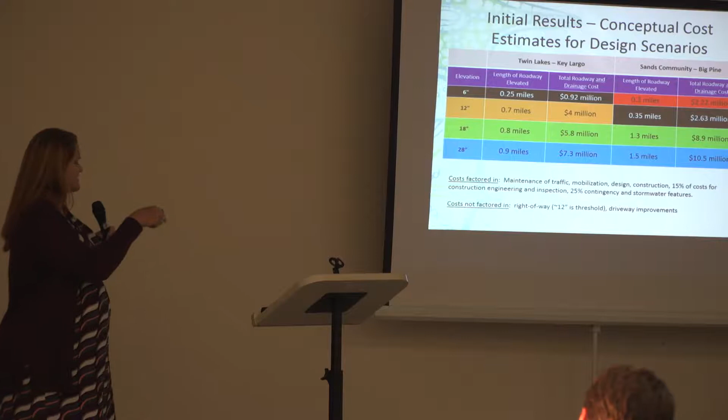So, along with that, the county developed a process. And they have ultimately adopted this design criteria. So now you have another suggestion on roads. Figure out what your design criteria is for future flood risk and adopt that into your code. First thing is figure out what level of sea level rise you want to protect to.

The county chose median, low, median, high projection. They chose median because this was their first project out of the box. And the idea was if they can get the stormwater in, if they can get the road base rebuilt, then it becomes a paving issue over time. And if their assumption is conservative and sea level rise is more progressive than what we originally thought, it's okay. You don't have to go back in and rip out that design. You've at least designed the road to accommodate some level of future flood risk.

So then, on top of it, how long do you not want your road to flood? How long do you want to keep people's feet dry? 30 days seemed like something that, quite frankly, from an engineering standpoint, was too hard and too long to guarantee. And 1 day was kind of ridiculous if you tell people, we're going to keep your feet dry, only let you flood 1 day. So we picked 7 days, a not to exceed standard of 7 days per year. We looked at the local conditions within that particular neighborhood to make sure that we could accommodate sea level rise and not flood more than 7 days per year.

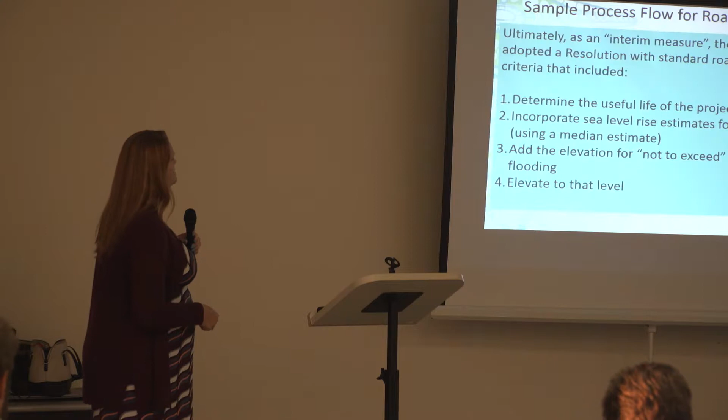So this is the process. At this point, what the county did in terms of looking at local factors, they were able to meet that design criteria with these 2 pilot projects. And ultimately what they did in a resolution is they adopted that design criteria. Just the not to exceed 7 days of flooding, figure out how long the road's going to be in service, and adopt to a sea level rise scenario and elevate to that level.

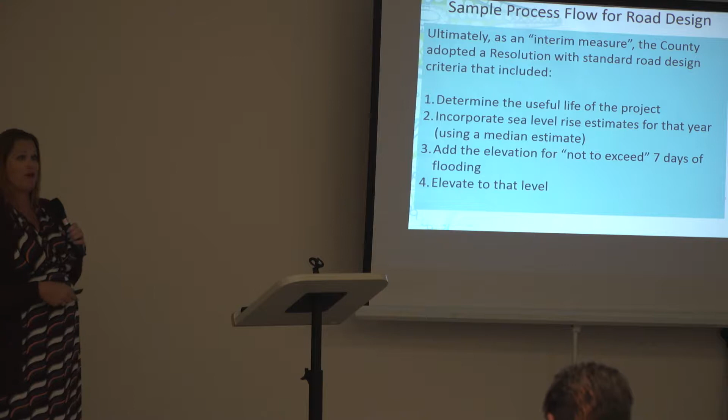And I'm happy to say that the county just put out the bid last week to bring in engineers to actually design those 2 projects. And the people that live in those 2 neighborhoods are very, very happy right now, very excited to get those projects done.

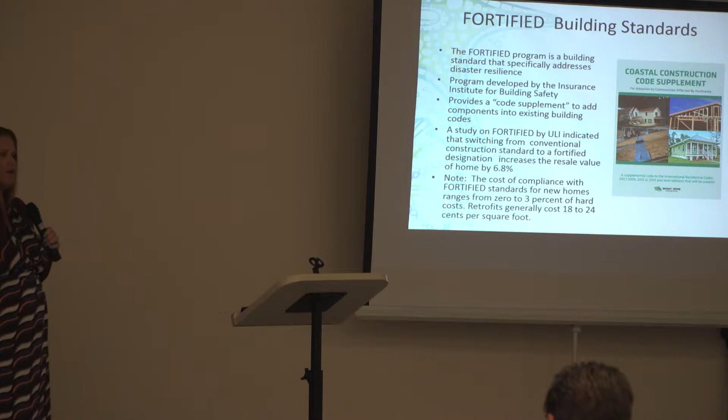The last thing I'm going to talk about is Fortified Building Standards. Fortified is a code promoted by the Insurance Institute for Building Safety, and essentially it's an above-code standard. Has anybody heard of LEED, Leadership in Energy and Environmental Design? This code supplement essentially deals with flood and wind risk.

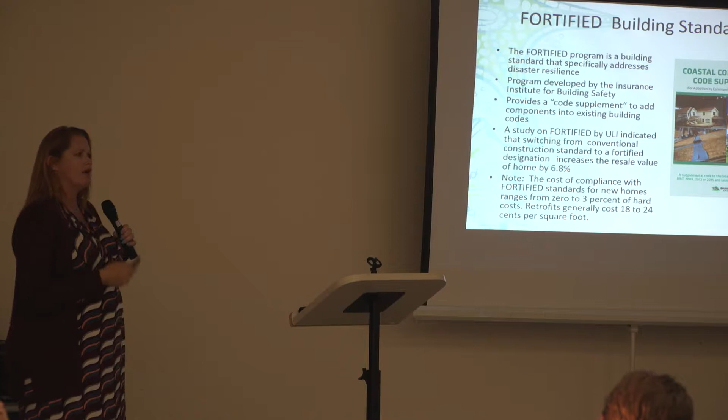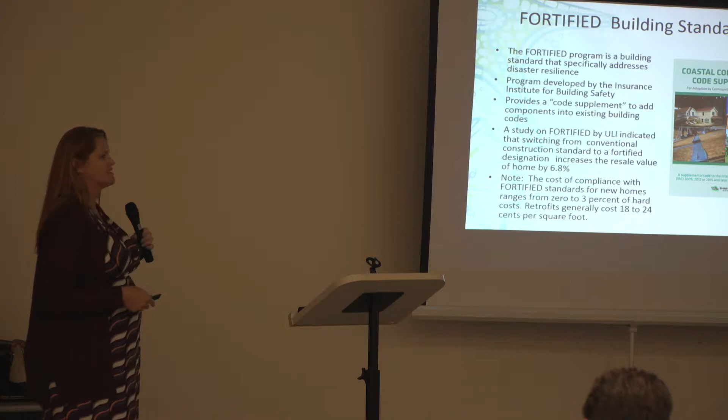So it's essentially designing to something higher than what the Florida Building Code may require. The Insurance Institute for Building Safety—I tell people these are the guys that build houses in big wind tunnels, put turbines on them, and figure out when the shingles are going to fly off. They figure out what the breaking point is for certain buildings.

They've worked to design this fortified standard. The Urban Land Institute has done studies saying if you construct to this standard, you're increasing your home value by up to 7%, which is a good thing. And the cost of compliance on new homes is obviously smaller than if you go back in and retrofit. So it's an economic decision, but the most valuable thing the Insurance Institute for Building Safety has produced is what they call a code supplement.

Basically what that does is say here's how you would take this standard and draft it into local government building code language, so that you could potentially adopt it. You may need to do a technical deviation from the Florida Building Code, but the benefits outweigh the costs, so it's something to consider.

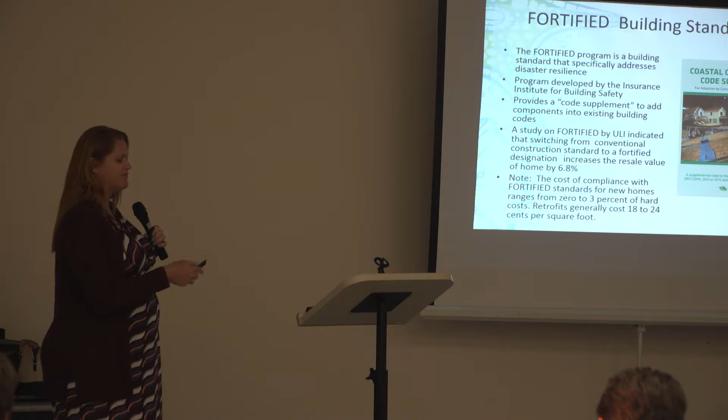Many states are adopting this standard. Oklahoma adopted it for tornado resilience. Alabama has, the Carolinas have. So it's just another thing to consider—stick a toe in the water, maybe you incentivize instead of requiring construction to this. We'll give you expedited building permits, or waive fees, that type of thing, if you want to build to this standard.

So again, that's kind of a who's who of what other local governments are doing on this stuff. Some of these things have been brought up before in other public workshops, and we just wanted to put a finer point on who's doing this across the state of Florida. So that's all we have for presentations.

Mr. Fergus: Bad news first, I guess. I read an article that Miami Beach had a problem. They raised a road, and the insurer for one of the businesses—I think it was a restaurant next to the road—denied them a claim because it was a basement, below the level of the road. These are some interesting legal issues that are going to come up when folks start raising roads.

Just that it's out there, these unintended consequences. Tom and I are very aware of that. Miami Beach, when they went through their road elevation project, they went like this: 2060, 24 inches, that looks good. I'm not suggesting that approach for elevating roads—that's what I would call the go big or go home strategy.

Monroe County, to me, is probably a more pragmatic model in terms of figuring out what level of sea level rise you want to design to. How long is that road system going to be in service? Designing to a 2060 standard, you're going to be through 2 road cycles at that point in terms of paving, milling, infrastructure reinforcement. Why not look at the useful life of that potential road facility?